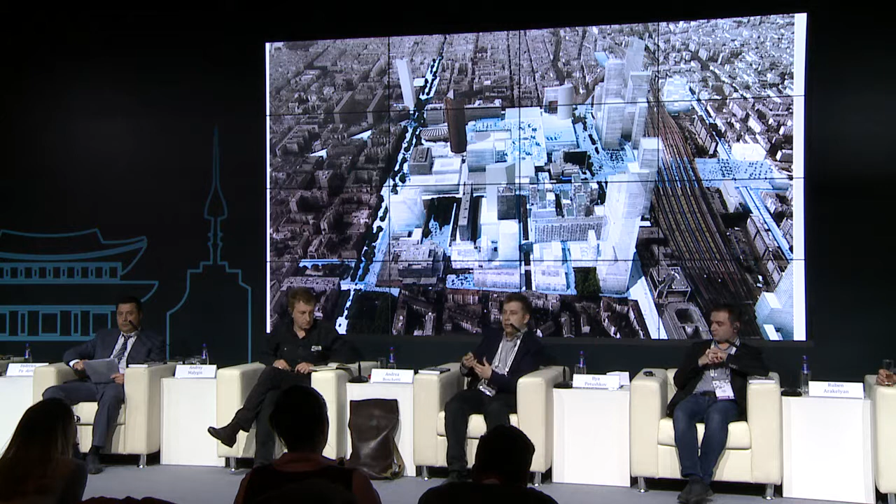As public transport transports a lot more people than private vehicles can, we inevitably see housing growing around it. Retail, housing, offices grow around it, and when we have more housing, more offices and more retail, we need more transport to deliver all those people who want to come to these places.

Transit oriented development is probably the best term for this approach. There is no equivalent for the moment in Russian.

It is great that we have architects in the panel. I'm not an architect, so I always admire such projects. Public transport is part of our life - we commute every day somewhere, and it is great that we have such a great metro network.

It is very important to have great interchanges as well. Interchanges are an important part of the architectural assets of a city, and you have to have a special treatment towards this kind of sites. This is why in Moscow we invite the best architects to work on such projects.

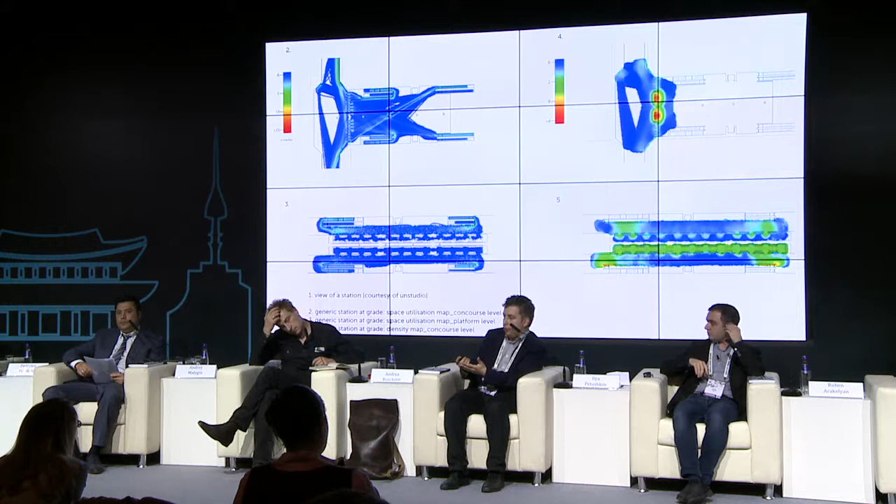Once you plan it, once you build it, it's very difficult to change. This is why urban planners are actually needed - pedestrian planning is one of the tools that allows architects and engineers to see things they could not foresee beforehand.

This is a screenshot from a video that one can make to simulate how passenger flows would move. Legion software is one of them, for instance.

I also wanted to talk about other types of interchanges, because when we talk about interchanges in Moscow, people imagine a huge metro station with a lot of office buildings, flat blocks, and retail - they always imagine a huge infrastructural site. But actually, interchanges can be different.

Any place where people change from one transport to another, or from one bus to another, is already an interchange. For instance, around metro stations there are always bus stations, and people change from metro to buses, but at the same time you have chaotic retail.

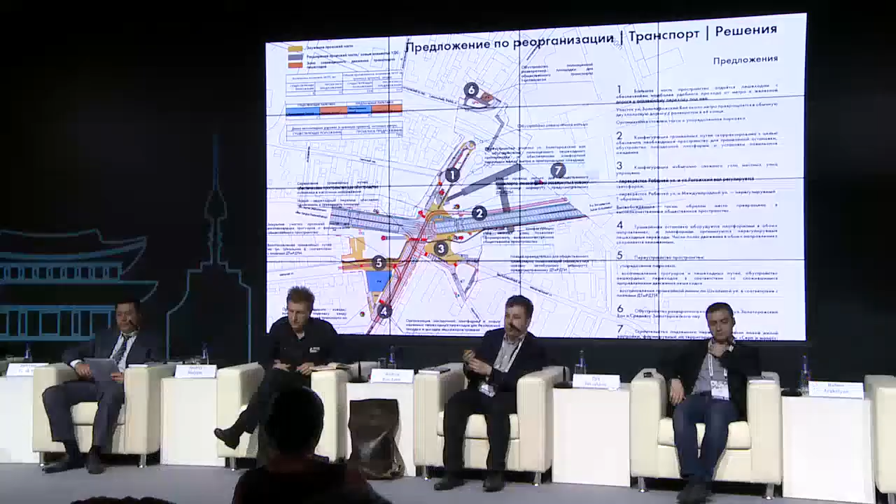Construction - for instance, our company participated in the refurbishment of the space around 15 metro stations. At the Ploshchad Ilyicha station, when we started working there, we found out that there is a lot of unused road space, and a strange asphalted triangle used for chaotic parking. You know, if you've been there, that the space around the metro station does require renovation.

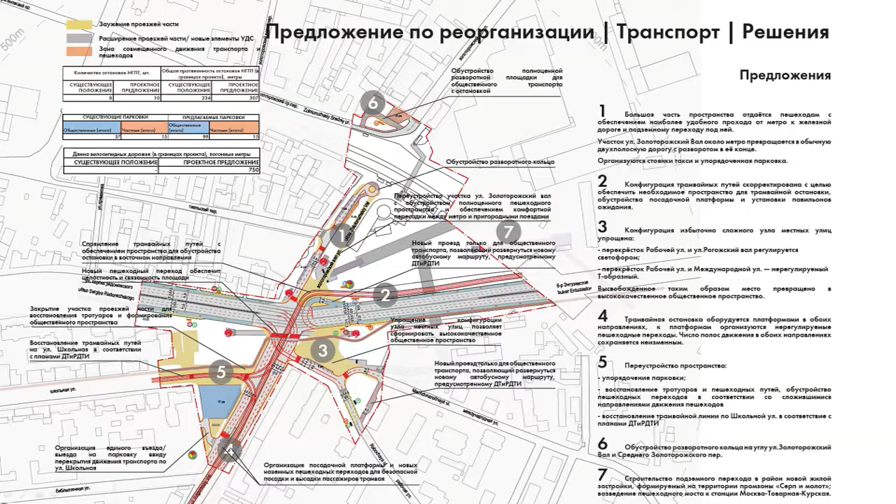We don't need big investments here - measures that work in a linear way can achieve a lot. I think policy here should be of high quality. Thank you very much for the opportunity to make a speech here.

Let's have Ruben explain his project for Pavelyetskaya. Sorry about that - I've been there several times, but I will never learn how to pronounce it. So, Ruben, please. It's okay.

Good afternoon. Thank you for the invitation. Can you also switch on the presentation?

So now, if we're speaking about interchange hubs, these hubs are very important because they are linked with a lot of traffic of people and density. So when this traffic is concentrated, this is of course because of urbanization. I would like to mention three key things.

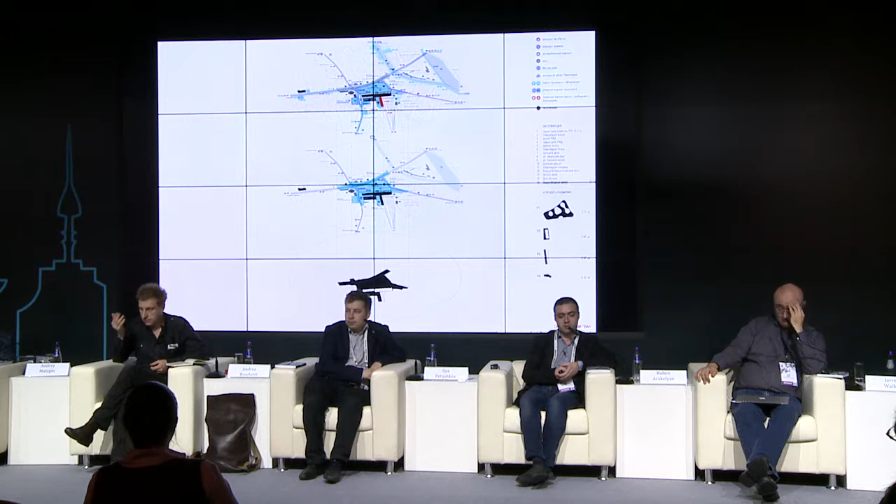First of all, network. We know that the urban environment now is not even about buildings, but mostly about flows or traffic. Here we have density and a lot of trajectories of people and transport. We have the project of Pavelyetskaya Square, and there are so many different crossings of traffic.

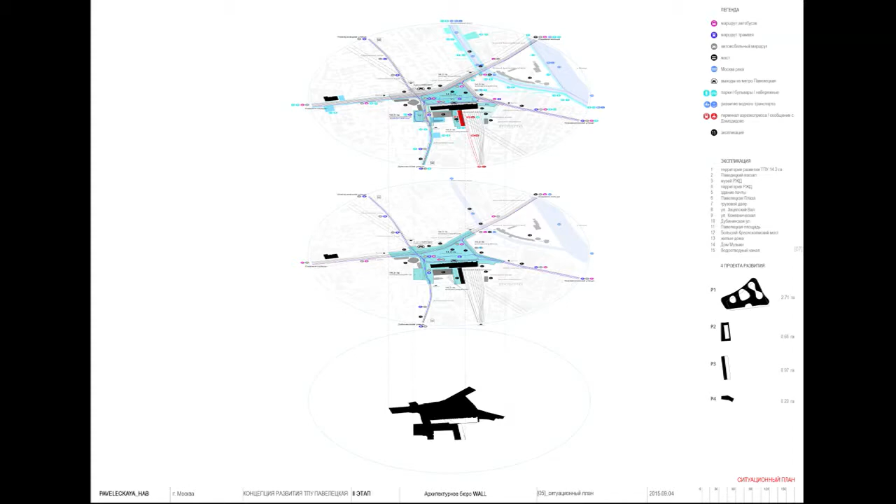Here you can see anything and everything: buses, railway stations, public transport, commuters coming to Pavelyetskaya station. Here we can see Pavelyetskaya Square and Pavelyetskaya railway station.

There is a hub, and there is crossing of a lot of different traffic, and we need to develop the system. We need to implement a new project because this will be new. So this will be work of our engineers.

And now at Pavelyetskaya station we can see some kind of chaos. There are many different types of traffic, and they are not well structured. That's why it seems to be so chaotic.

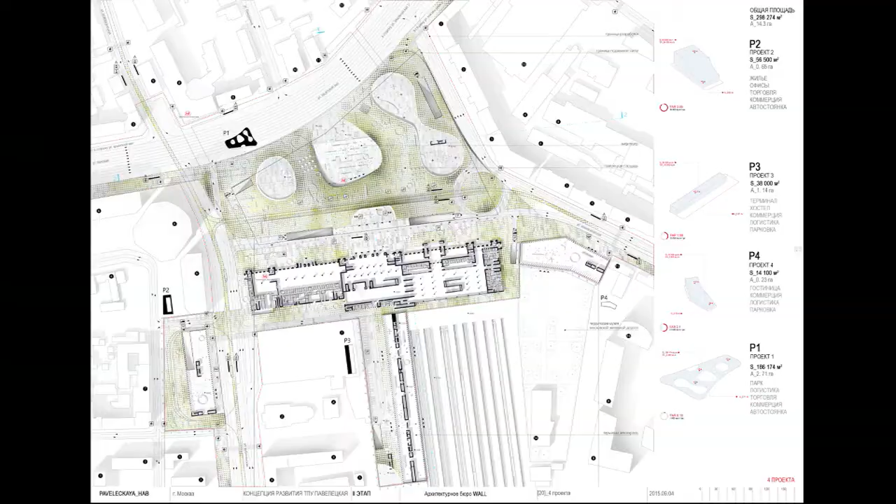This is our master plan. You can see the Paveletsky station here. If we speak about our system, we can see the material implementation, but the city decided that the station should not be built too much. There should not be so many buildings, and we need to make all this traffic underground, and there should be some kind of emptiness on the station.

Here we differentiated flows. These are the flows of radial and circle lines of Paveletsky subway, and then traffic from airports, the Domodedovo airport, and then flows of just citizens and visitors of this place, and then public transport.

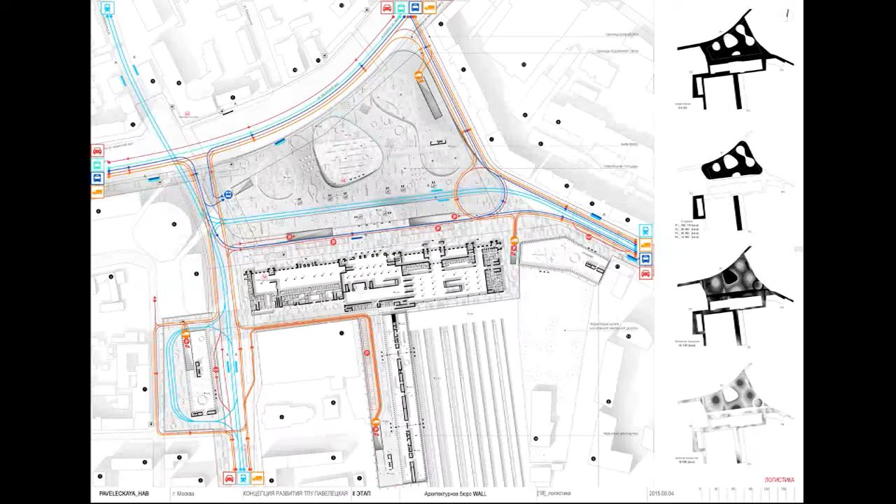It was important for us to develop these flows in this place. Then organism is important in the system, because any structure, any site, any building can equal a human body, and here the structure is important.

You can see that we analyzed this body, and we see now how these flows cross. The station itself, it's an empty place, a park. We made a concept of an underground city when a person, without going to the city, without going out to the street, he can get all accomplishments of the infrastructure.

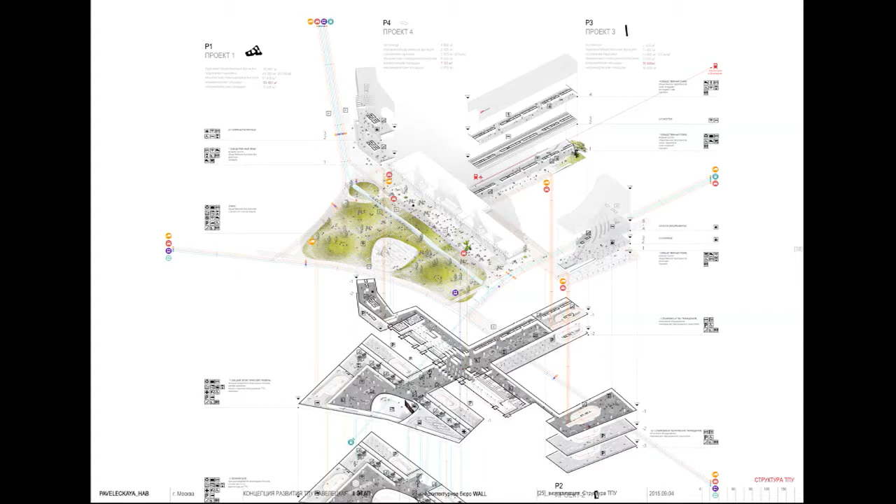I can go downside, I can go to the subway, get the bus, and I can go to the hotel, so without going to the street. But this is -1, it's underground. People don't go upwards, but still people can get all accomplishments of the city.

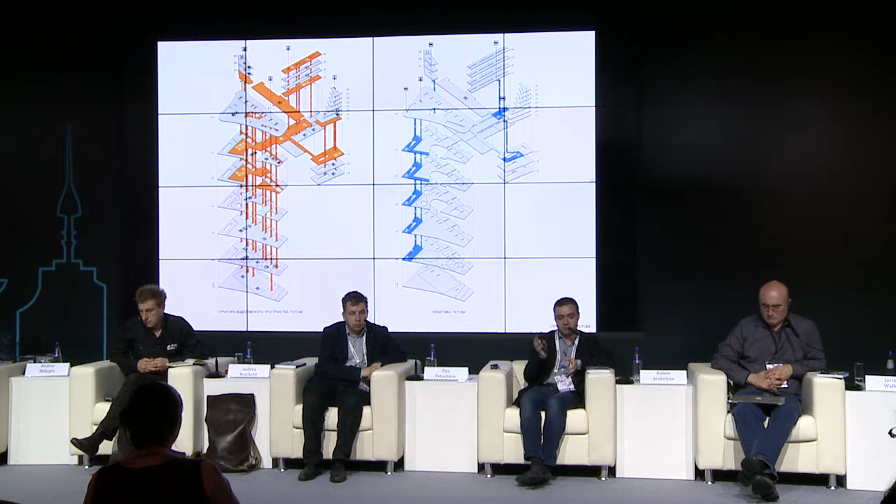And then here logistics is very simple. Logistic access and public access. In the project, you can see all points of access highlighted by blue. These are logistics of all this body.

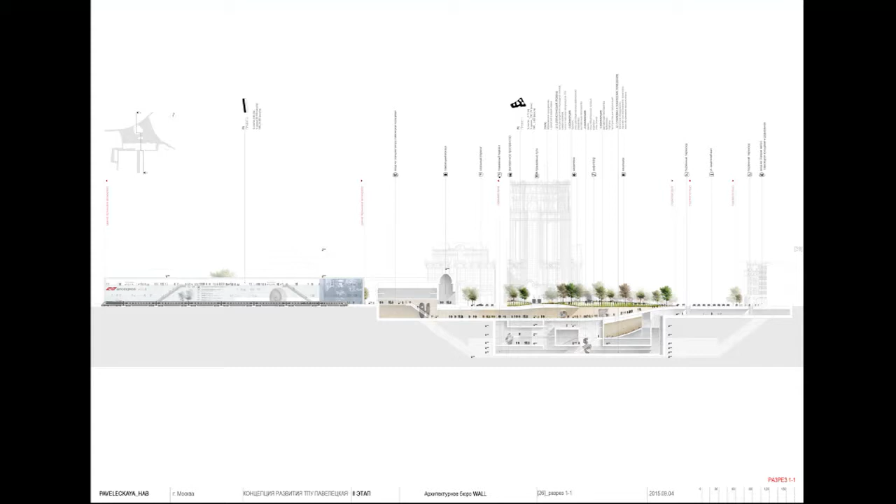And then city environment is important. Transport system also should be important. We wanted to have the transport underground, and we somehow guided this project with parks.

And the last thing, it's an image, it's a character, because this is an engineering structure, and the image is important. In our bureau, we try to use this model.

In the center, this is the Paveletsky station and the surroundings, and it's like an old city, and it's underground, and above you can see it. These are like slopes, and the slopes form identity of the city.

The square should not be just a park, a chaotic park. It should have also its features. These are like concrete slopes, and this is like a horizontal home above the city, but it has some peaks, so higher slopes, and these slopes, these small hills, they also disguise the transport underneath.

You can see here again the small hills, and they are also important. Also, new terminal will be created for the trains. We want to make the building hybrid, and the view of this underground square.

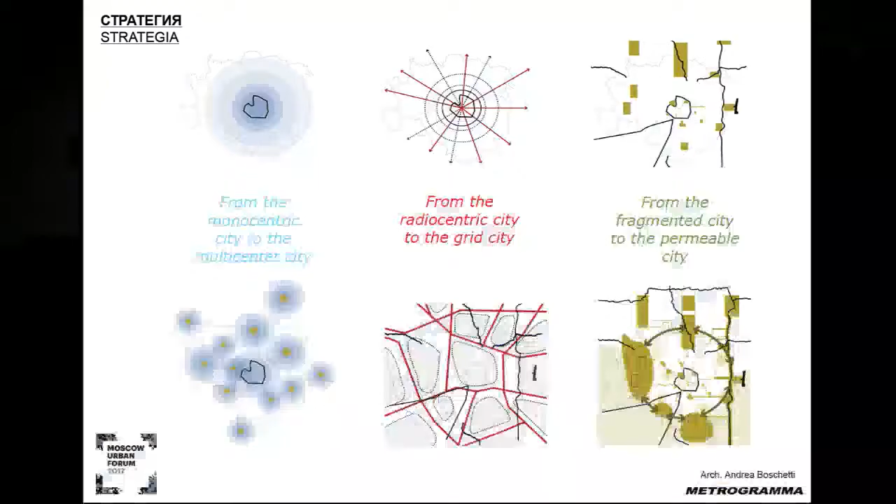So this is the 3 most important strategies for our work. In the first, you can see... so we start from these 3 points.

The first point is important because we want to move from the monocentric city, like Milano actually is, to the multi-center city. The second point is to move from the radiocentric city to the typical grid city. And the third point is from fragmented city to the permeable city.

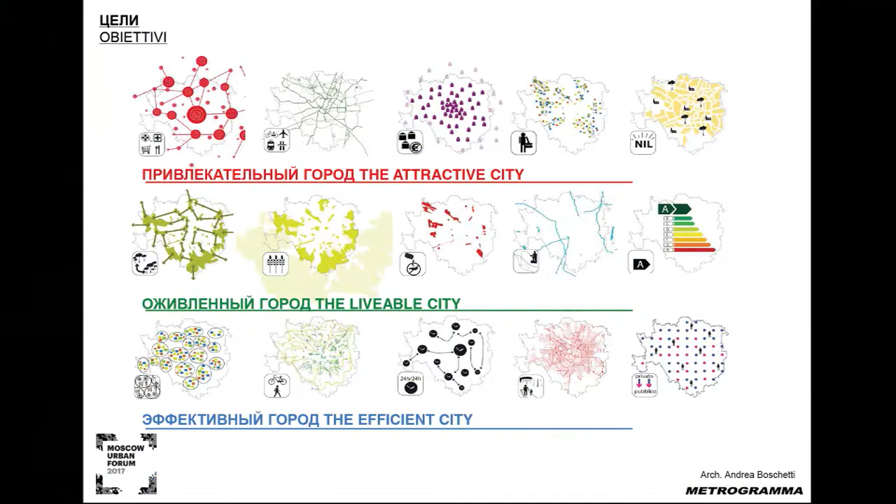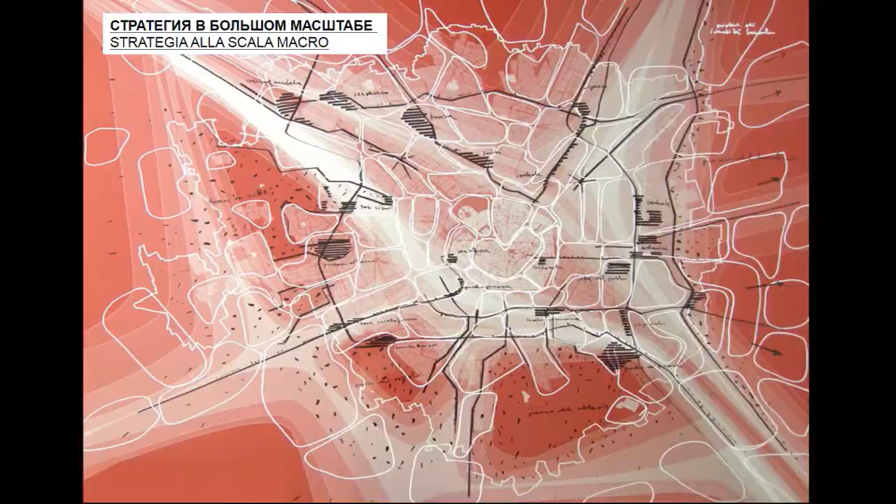This is really important because the goals of the politicians are typically that they want a city much more attractive, much more livable, much more efficient. But what is important to understand is that we didn't want to expand the city more. So we want to work inside the city.

So this is one of the first sketches that we did for Milano, in which you find in black the big areas that the government needs to transform inside the city of Milano. But we want to work in 2 important ways.

One is the big strategy, the big scale of transformation, so the macro area in which we want to begin the transformation. And the second way is the micro city, so the small scale, the neighborhood, the district, because also in this small part of the city it's important to understand what is an interchange hub.

So I think from this point we can speak a little bit more about these two ways. The first is the big strategy of the large scale, where we find the dismantled industrial areas and the railway depots.

It's really important square meterage inside of Milano, and we want to transform this occasion into an opportunity for all the city. We call this strategy 'epicenters' because we want to transfer the goals of the environment, the development of this area, to all the city.

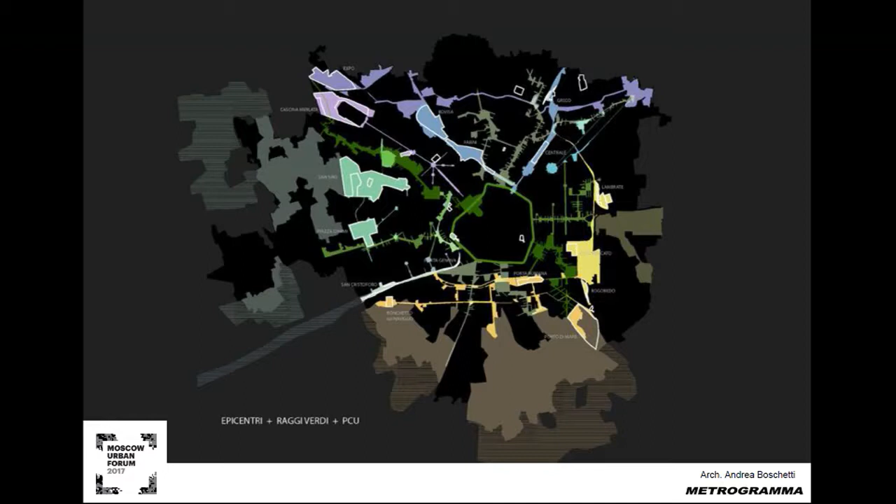And we want to find new drivers of the city. This is also the result of this first diagram of changing, where you find very well the relationship between all these big areas inside the city—not like islands, but connected in a grid.

In the big interchange hubs, we don't want to, how to say, give guide rules exactly for the morphology of the future of the city, but we want to just fix some guide rules about the public interest.

For sure services, for sure mobility, and for sure green — how much quantity, where, and which kind of condition. And after, we wanted to leave free the next step of the project.

This is exactly the schematic general plan of Milano, and this is the first drawing of the results. This is one example of one big area: exactly, it's the Scalo di Porta Romana.

It's a railway depot where now nothing stays — just trains and one big wall around this island area, because people couldn't go inside. Now it can be used like a city, and it's now actually a part of the city.

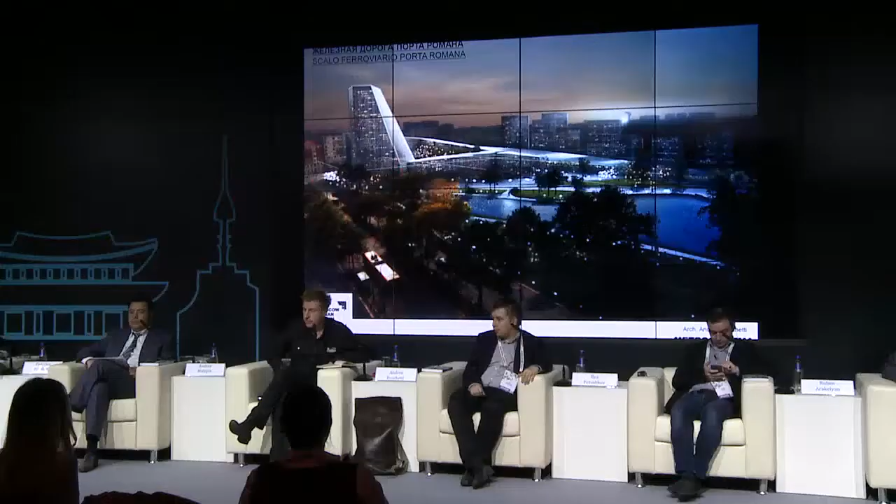And this shows some example scenarios of the transformation of this big area. But like I told you, it's really important also the second way of strategy — the small points inside, the micro transformation inside the city.

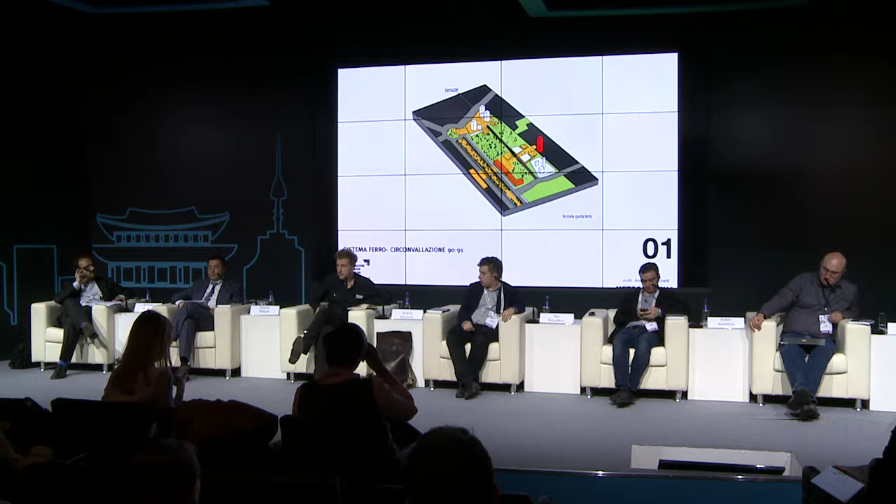A little example about this — this is all the part in the south of Milano, where we found more than 14 or 15 big projects, with inside much more than 18 hundred small projects to do.

So this is the strategy that we made for the general plan of Milano, and this is some results now, the work in progress of the transformation, because now it's much more than 5 years ago, this work has already changed.

This is, for example, the area of Porta Romana, where now stays the transformation of the Prada Foundation, a new museum by OMA, by Rem Koolhaas.

This, for example, is another important project, Garibaldi Repubblica. This is 15 years ago, and now with this political and changing strategy, these are the results of the transformation.

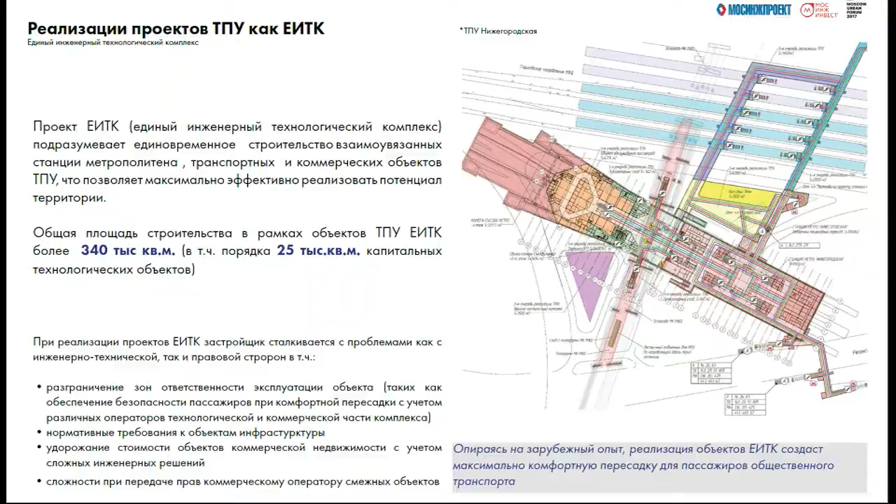Well, I can go into more detail during the Q&A session. The only thing I wanted to show you were 2 interchanges out of the 70 we're building. They're not all made as a building. Some of them are just simple interchanges. Well, this interchange is probably the most complex one, technologically wise and functionally wise.

Because railway, metro lines, bus lines would interconnect there. Private vehicles would also be connected to this interchange.

So the commuters and the passengers would be able to change from the railway to the public transport of the city. There will also be an access to the Moscow Central Circle. Buildings and roofs would be provided to cover passengers from rain and snow. The overall area is 340,000 square meters.

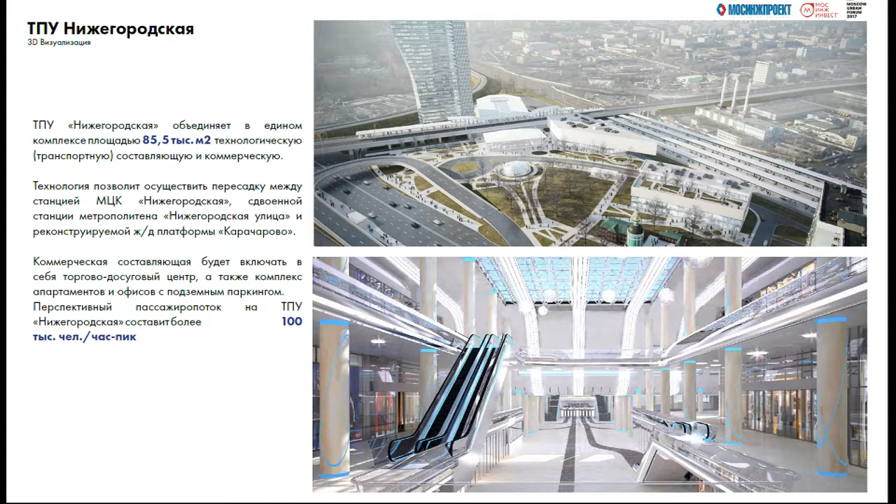This is a flagship project for us. It actually incarnates the possible complexity of such projects. I would also present a similar project. This is how it is going to look like. At least this is our vision of what we want to make in the end. The design phase is almost finished, so this is quite close to what we're going to have in the future.

And the second project is the Lermontovsky Prospect interchange, also quite a complex project. Metro is connected with other modes of transport. Without going outside, you can go either to a shopping mall or you can change to a different transport line. 43,000 square meters of buildings, which includes a mall and an infrastructural area.

So these two projects are an example of what we're doing. These are the most complex projects. There are simpler projects, of course, but all in all, our goal is to create interchanges that are as comfortable as possible. Thank you.

Thanks, Andrei. It's very interesting to see the scale of the things that are happening in Moscow and the complexity that you have to deal with when it comes to interchanges. I'm sure there will be plenty of questions, but before we move on to the questions...